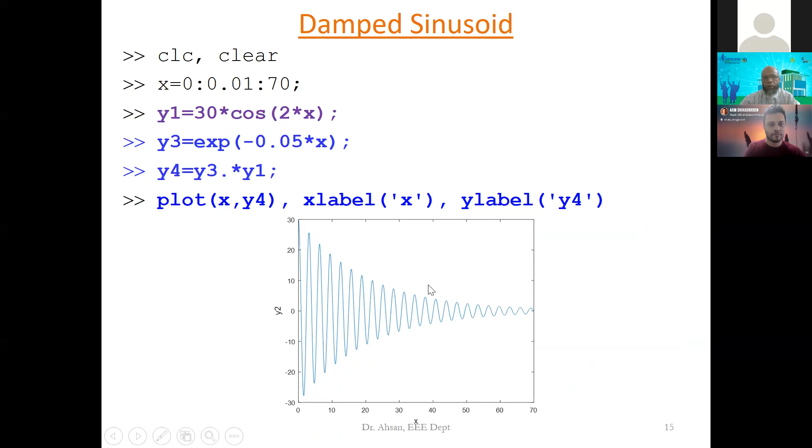So in fact, this is damping the amplitude of this cosine wave. So the ultimate waveform will look like this. Now let us go for our courses.

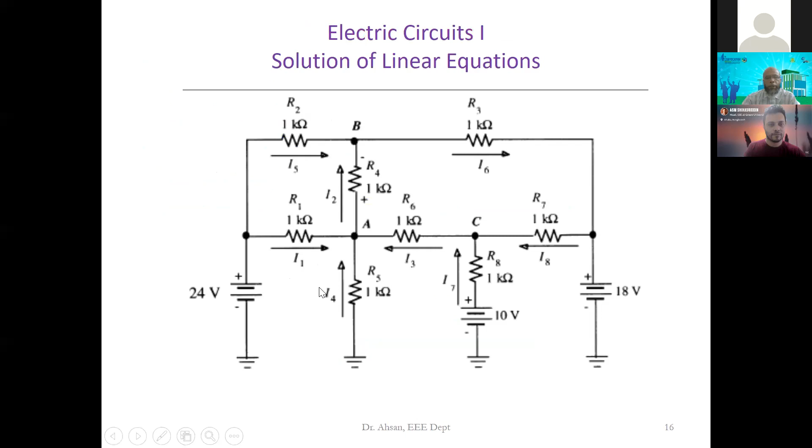In our electrical circuit course, we use nodal equations or loop equations to find the node voltage or loop current or other unknowns. So it will be very handy and very simple to solve a large circuit with a large number of nodes, just by writing these node equations and then rearranging them in a matrix form.

Let's say we have 3 nodes, VA, VB, and VC. So with a single command, you can get the node voltages. So this is my A matrix, which is this one, and this is the B matrix, which is on the right side, and with the single command, either A inverse B, or this A \ B, that will give you this operation and give you this result.

So this is a one step solution. So I will not go for this one in the Matlab running program. I will go for a little bit more complex programs. So for large or complex programs, we'll go for the script file, or we frequently call it the M file. So this M file is a collection of executable commands.

So just now I showed you some commands in this command window. We can put all the commands or all the plot commands in an editor window, and then we can run them together. So that file is called the script file, and it is very useful for executing a lot of Matlab commands.

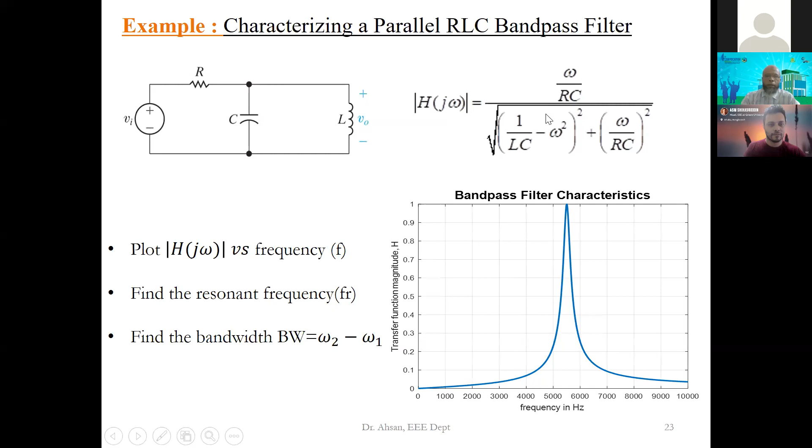So for this, what will we do? We have this, and this is called your transfer function. So we will just solve this equation for different frequencies, and after that we plot it. Only 3 steps. So that is what I am doing here. I am creating an array for different frequencies, solving that equation for different frequencies, and after that I am plotting it. It is as simple as this.

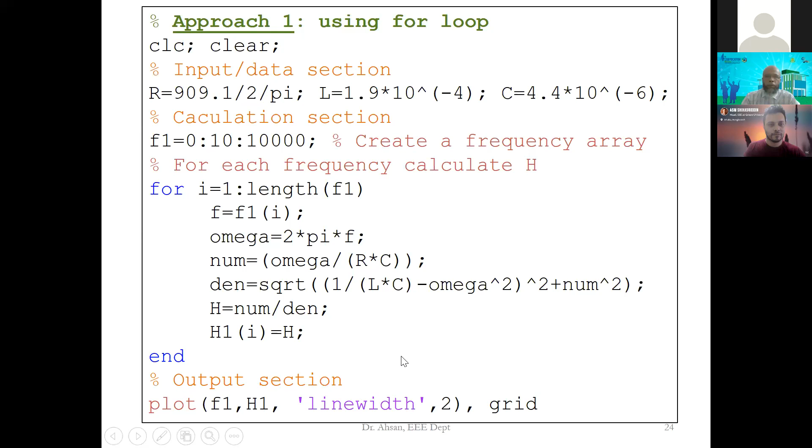And now we can solve this even without a for loop. And how can we do it? We will just create an array for the numerator and another one for the denominator, and then do element by element division. That will give you the same value as with the for loop. So sometimes this element by element or dot operation will make our programming very simple, very easy to understand.

And that will give you the same kind of plot. Now, what is after this plotting? We want to find the bandwidth and the resonance frequency. So the resonance frequency is the value where the peak is, or we call it the center frequency. So from the graph, we can find it easily. And also for the bandwidth.

So for the bandwidth, we find two cutoff frequencies. One is called F1, another is called F2. So how will we decide this cutoff frequency? This is called the half power point or level, where the power will be half of that at the resonance frequency. So we can draw a line, this one, using this simple command.

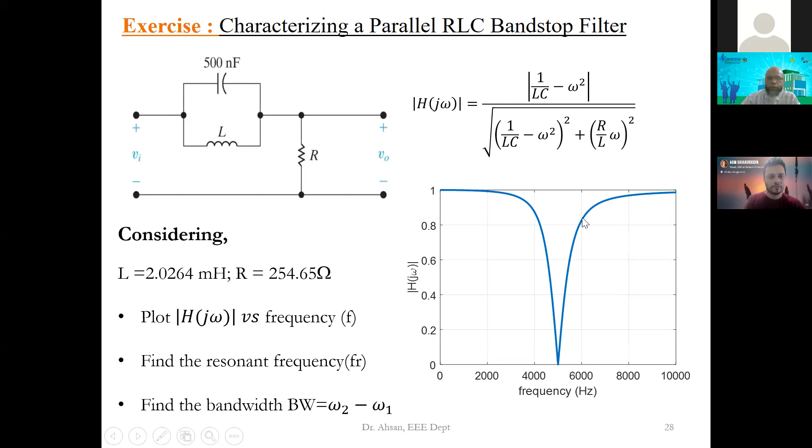So this is my center frequency, where the value will be the minimum. For the band stop, it will be minimum. For the band pass, it will be the maximum. And we can also find its cutoff frequencies by drawing this half power line.

Now let us go for the signals and systems course. For signals and systems, we frequently use the Fourier series. Let's say for a square wave, this is the Fourier series. Now, let's say we want to see reconstruction of the signal back to our square wave. This series is basically nothing but the summation of sinusoidal waves of various frequencies. The first one we call the fundamental frequency signal, and the others we call the harmonics.

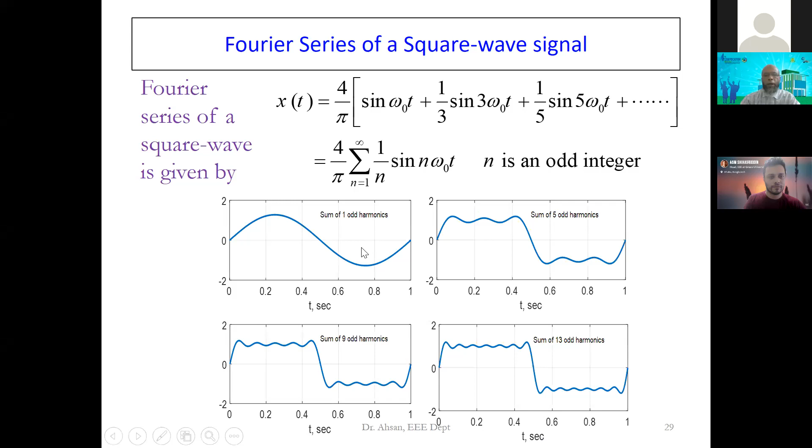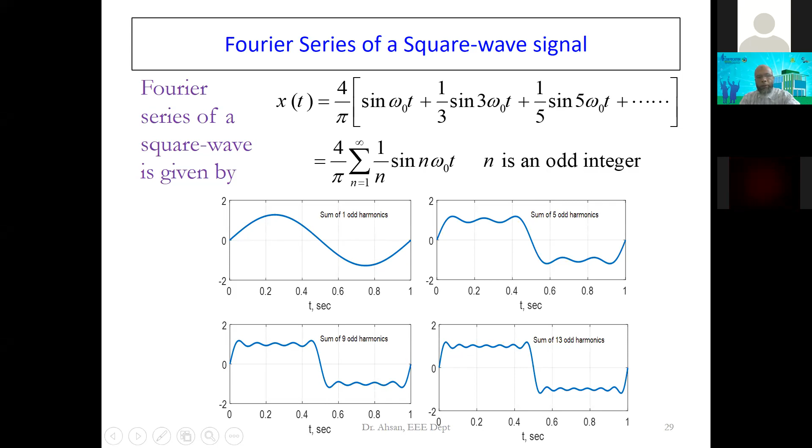So what will we do? If we run this for the fundamental frequency only, then we can see this kind of sinusoidal waveform. But as we keep on increasing the number of harmonics, it will slowly turn into the square wave. I will show you this. Let's say for the square wave, this run button is here. So this is for the fundamental frequency.

So as we keep on adding the harmonics, it is slowly turning to the square wave shape. In fact, it is reconstructing. And here I'm considering only 51 odd harmonics, so that means adding all the harmonics up to the 51st. It is giving us this kind of reconstruction.

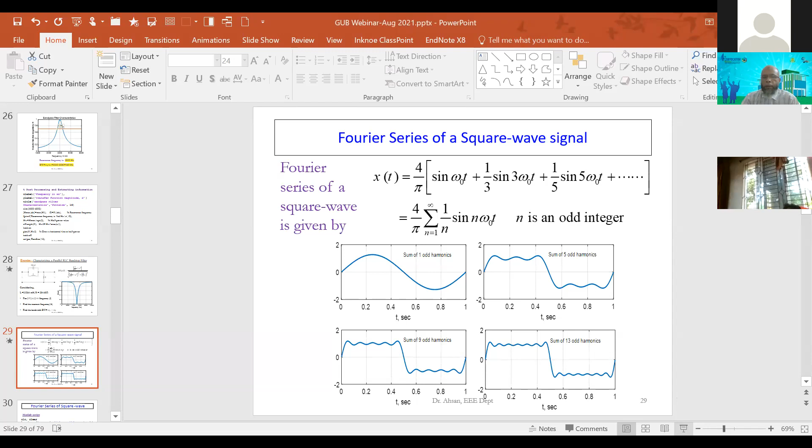And for the other one, let's say... Okay, for this, we are just executing this simple equation with for loops. Very simple. Here is all our data, and here is the plotting. The main calculation here is very simple. It starts with the fundamental frequency signal and then keeps on adding the other harmonics.

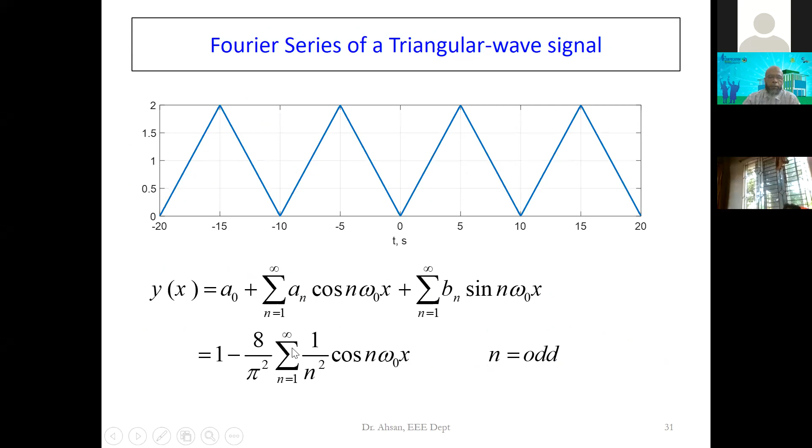And let's say another one. This is called the triangular signal, and for this, the Fourier series is this. So now we can do the same operation we did for our square wave. We need to solve this in a for loop and then plot it. So for a triangular wave, if we run it, this is for the fundamental wave.

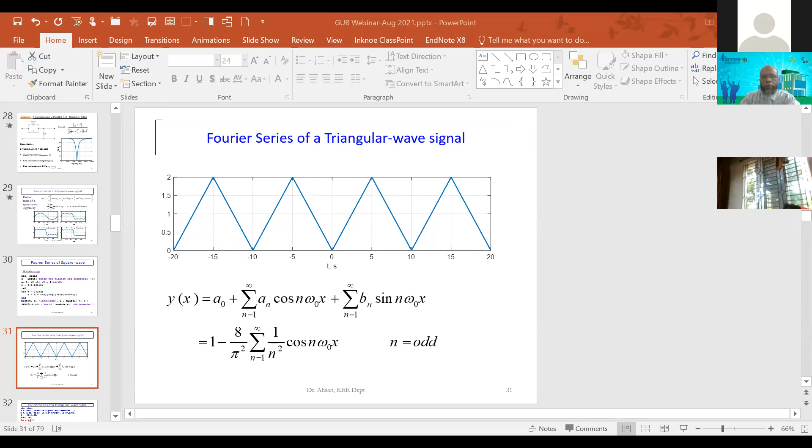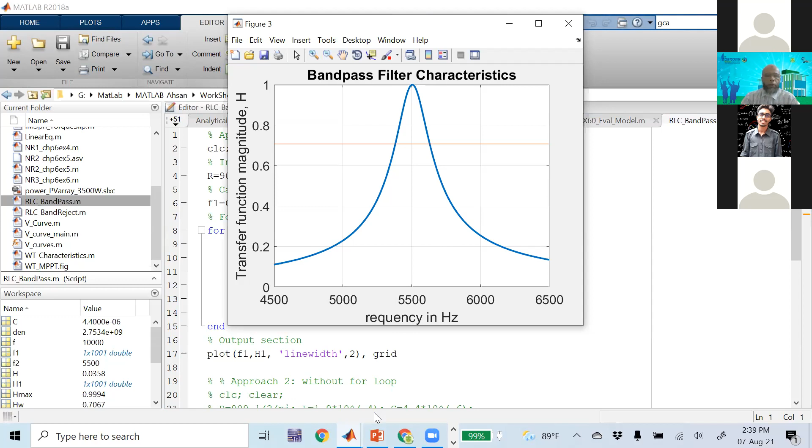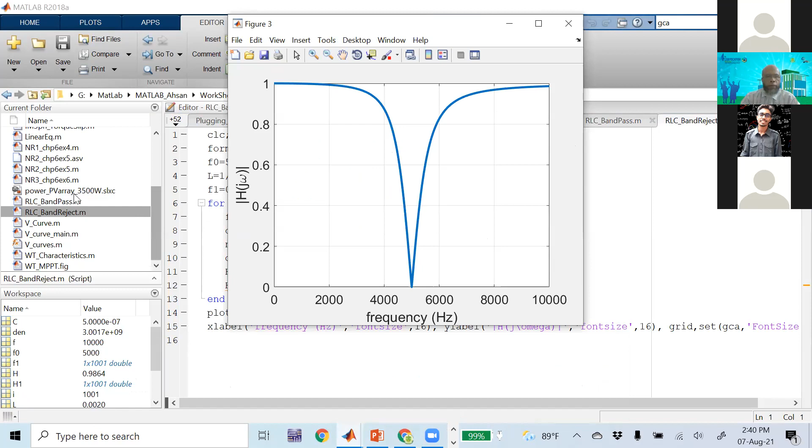Okay, good. And for the band reject, so this is the output for the band reject filter. And the programs, as I showed you, the same coding or the similar coding we are using inside the Matlab also. So I will not spend time for that.

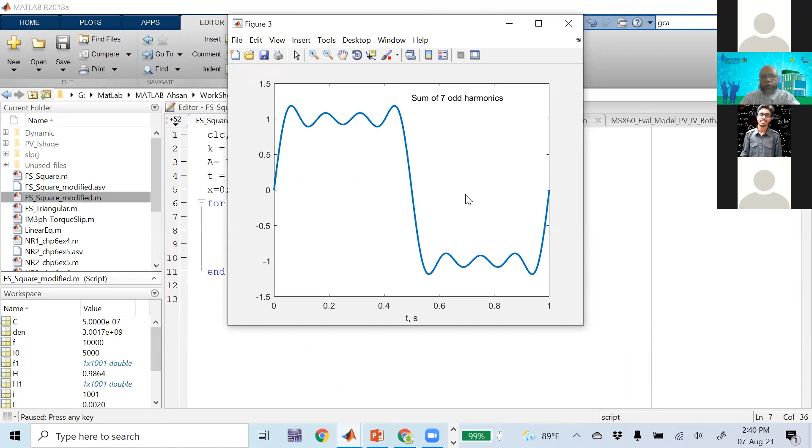Now I will go for this square wave Fourier series. So if we run this part, let me close this one. So for the fundamental frequency signal, we can see this is a nice sinusoidal waveform. As we keep on adding the harmonics, it will slowly turn to this square wave, or it is basically reconstructing the square wave. So can you see it? Yes, everybody? Okay.

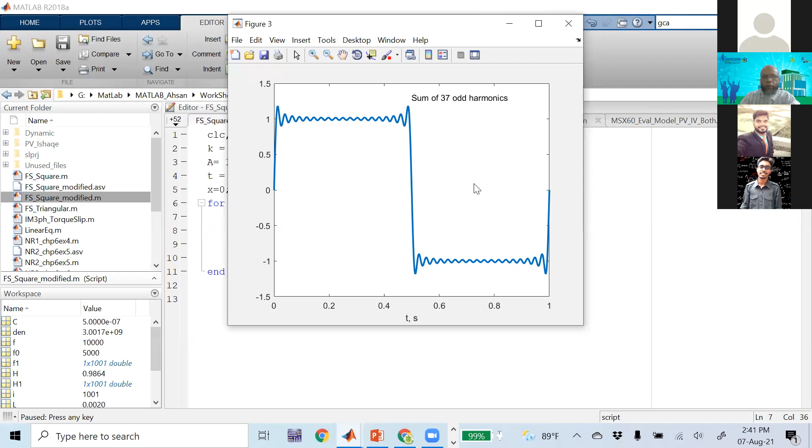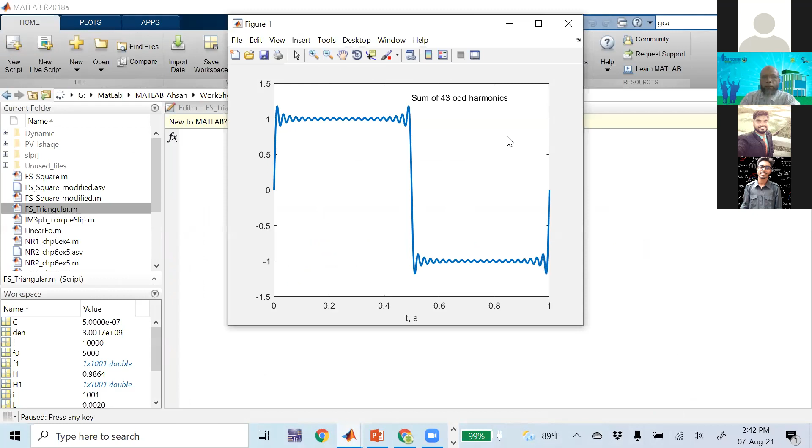Now for the triangular wave, the similar things. What you missed out, just quickly. It's taking time. I don't know why it is taking time. It is running in the background. I did not finish actually that one. That's why it did not finish.

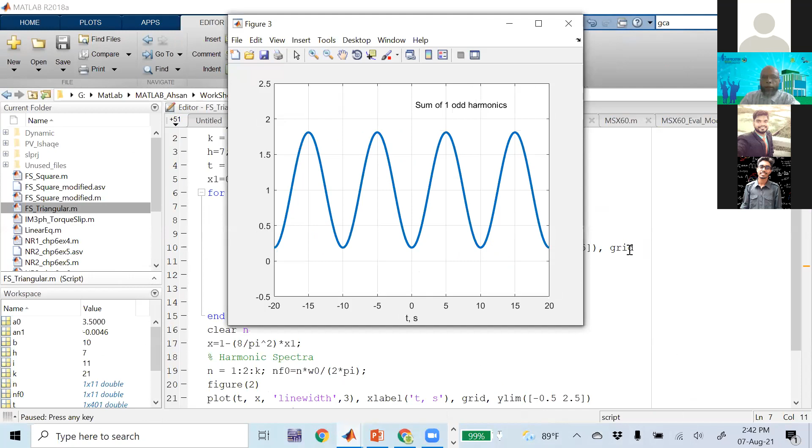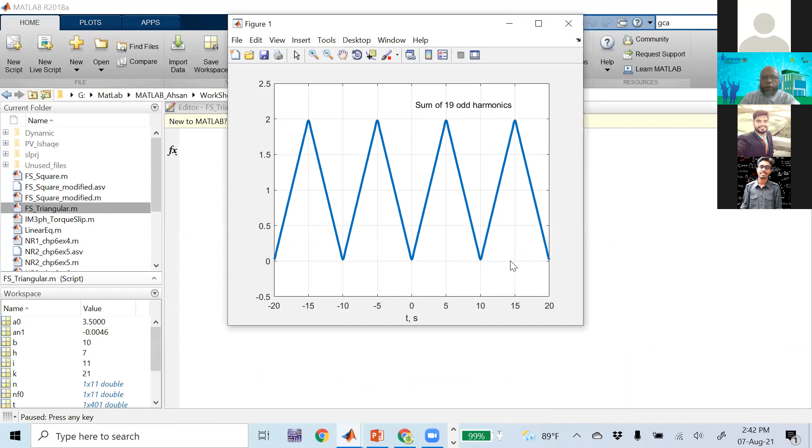Okay, for the triangular, we are doing the similar thing. So this is for the fundamental wave. If we keep on adding the harmonics, then it will slowly turn to the original triangular wave. And as I said, we want to see its spectrum plot also. Actually, it ran. So this is the spectrum plot.

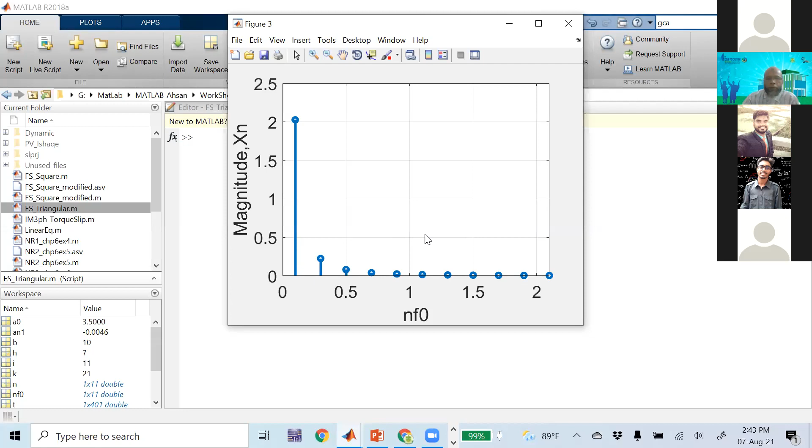From this, we can see the fundamental waveform has the highest influence. The second harmonic is a little bit, and the third one; after that, these harmonics are insignificant. Their contribution to the reconstruction of the original signal is insignificant. So basically here we need these three components to reconstruct the signal. Okay, now I will go further.

Can you see the screen now? Yes, sir. PowerPoint. Okay.

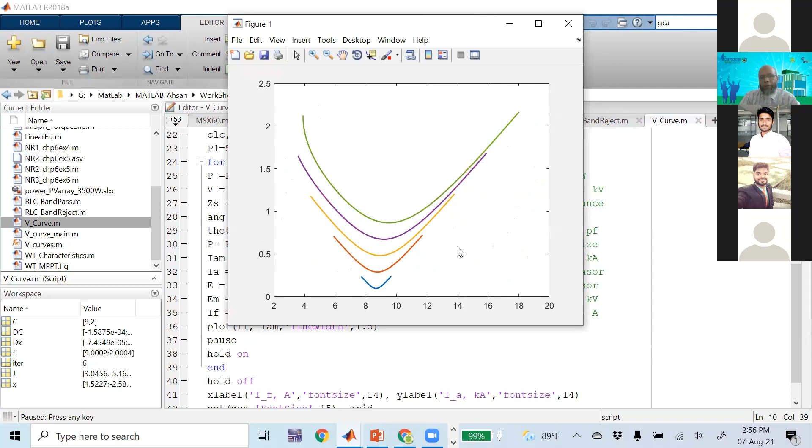So here it is giving some information related to the power factor. This lowest point is called the unity power factor point. If we join all these lowest points, we get a locus for unity power factor. The right side of this is called the leading power factor region, and the left side is called lagging power factor. So now the conclusion is by varying IF. On this axis we have IF.

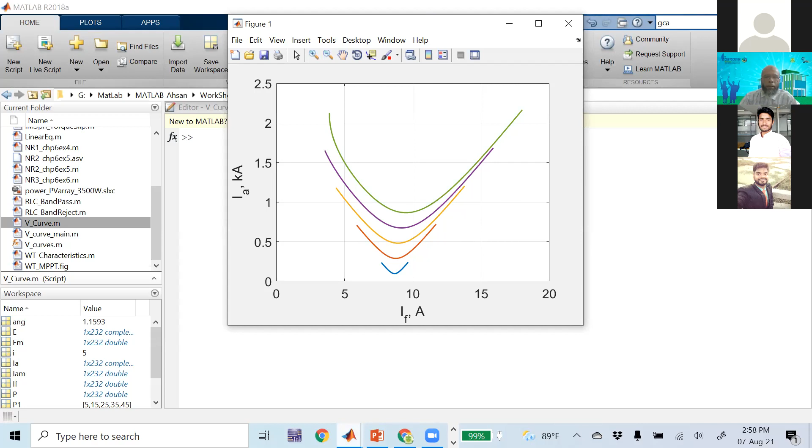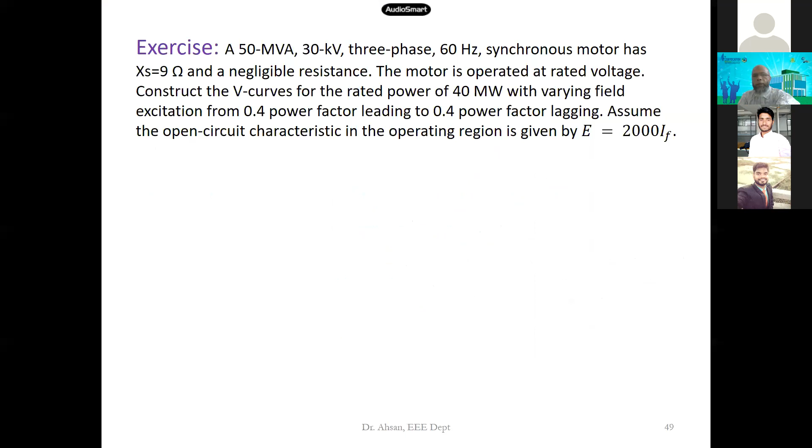So this machine is very useful; we frequently use it for power factor correction of our power system. This is a very popular use in power systems, since we can make a smooth variation of the power factor in the system. So these are the V curves, and this is the problem, or the data I took it from.

For calculation, I did only these 3 operations. From the power, I calculated the armature current, then EA and IF. Only by these 3 calculations can I produce the graph. And that program was for a single power.

So now if I vary this power, let's say from 5 megawatt to 45 megawatt with an increment of 10, we have to do the same operation in a for loop, or here I am using element by element multiplication, the dot multiplication. So instead of using the for loop, I am avoiding it by using this dot multiplication. And we have already seen the plot of this.

Now, how can we do the same plot using a function subprogram? Here, this part we are calculating again and again and plotting for different power. So if we put it in a function subprogram and call it in a main program, then our main program will look very simple. We are varying power, calling this subprogram, generating a plot, and doing the same thing until the loop completes.

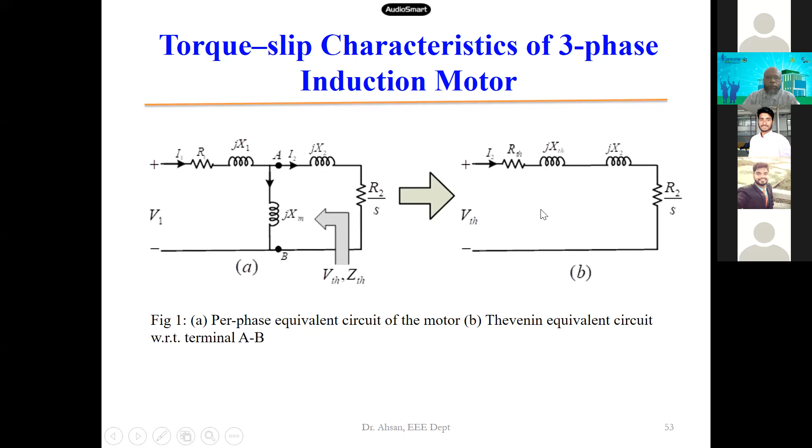Now we will go for another machine. This is called the induction machine. So how can we characterize this induction machine? This is the very simple equivalent circuit of an induction machine, and from there the Thevenin equivalent we can write like this. I will not go for the theory of this.

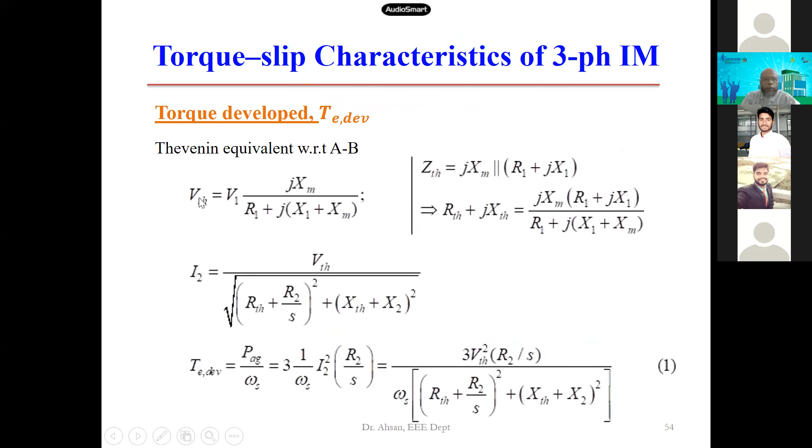And this is the electrical torque developed equation inside the induction machine. For generating this, we call it the torque slip curve of the three-phase induction machine. We will solve this one. For solving it, we need this I2 and V Thevenin also. So basically we will be solving these three equations. So let us solve it.

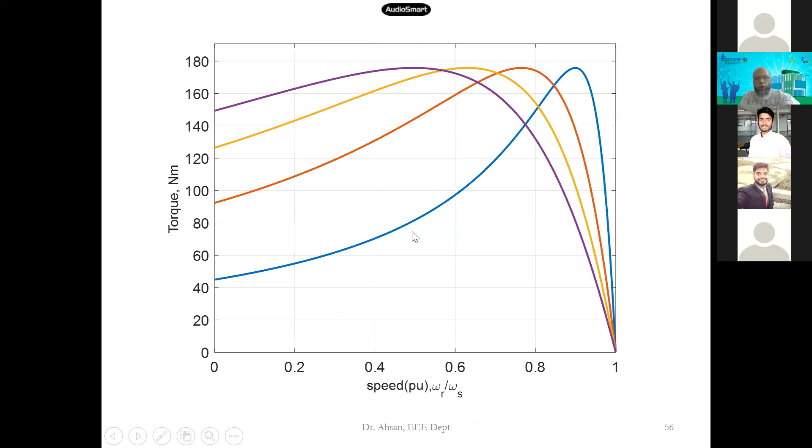okay. This is the characteristics curve for a three-phase induction motor, and this is called the torque slip characteristics. And we produced it for a certain value of R2. But if we keep on changing R2, what will be the effect of R2 on the torque slip characteristics? This is very important information, and a very important observation also.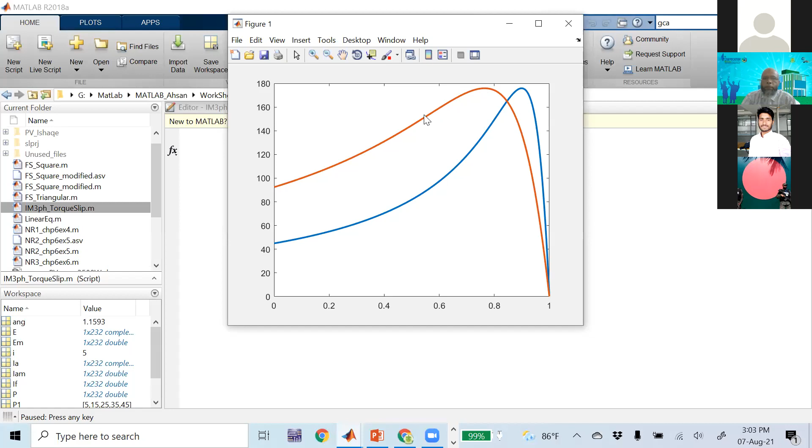If we increase R2, then the curve shape will be similar to the previous one. If we keep on increasing, it will take this kind of shape, and then this shape. So what information are we getting from here? This is the torque, and this is the speed. And we can see this maximum torque is remaining the same. It is not changing with the change of rotor resistance.

But what it is changing is the starting torque, that means torque at zero speed. With the lower value of R2, our starting torque will be small. And if we increase it, then it will be higher and higher. So this tells us that if we need to run a loaded machine, then we need to increase the rotor resistance, so that it will produce a higher starting torque.

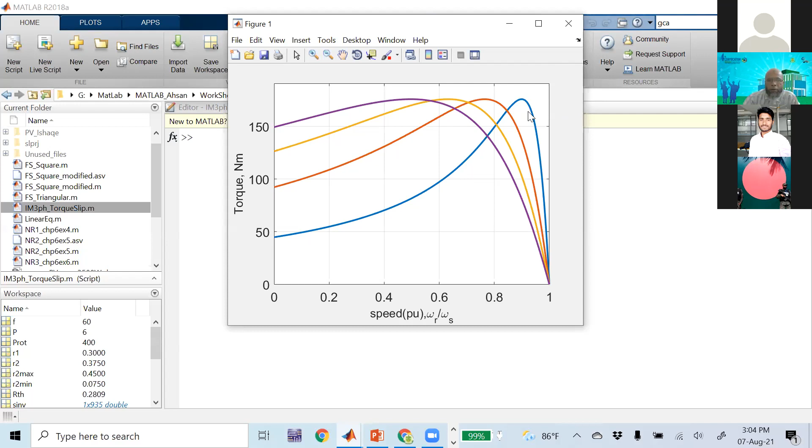But at the end, we have to cut off this rotor resistance, because if we keep this higher rotor resistance a long time, then we will have a higher loss. So at the beginning, for starting purposes, we increase the rotor resistance, then slowly cut it down. So this is the information it is giving us.

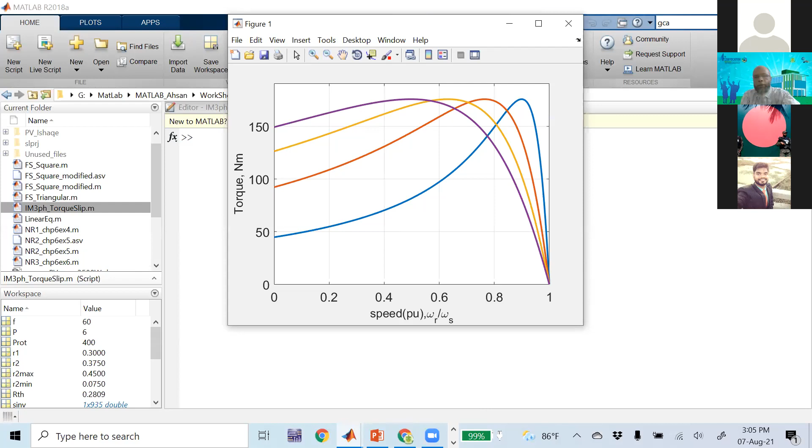Now we will go for dynamic equation solving, or dynamic systems. In fact, more interesting results, or analysis, we will see through the solution of dynamic systems. For solving a dynamic system, we write the dynamic equations or differential equations, and then we use the solver. Depending on the solution type or the equation type, we have different kinds of solvers.

This solver mainly has three parts. One is we have to write a function subprogram containing the differential equation. Then the time span, for how long we want to see this analysis, and the initial value. For solving any differential equation, we need the initial value. If the differential equation is third order, we have to put three different initial values. And we can have some other options also. Here is the description of all this.

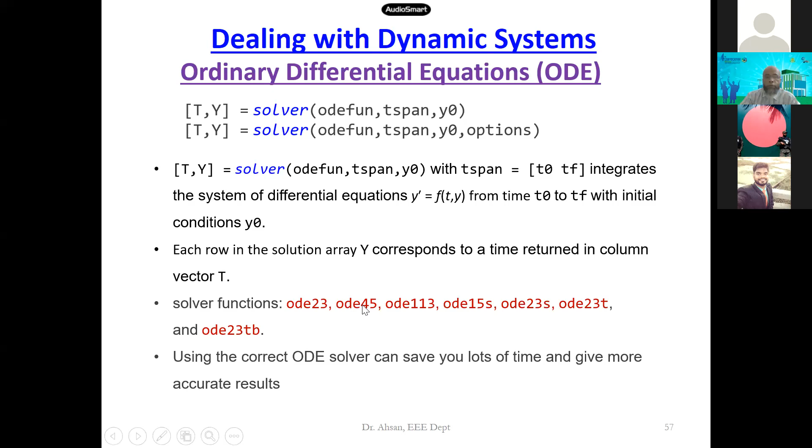So now let us look at the dynamic characteristics of our separately excited DC motor. Here you can see some interesting things. Let's say we have a DC motor, separately excited. That means the field circuit is separate from the armature circuit.

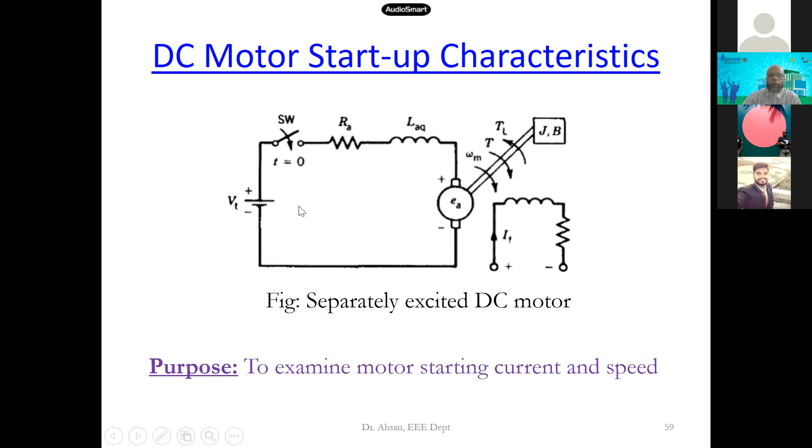And if we suddenly turn on the machine by connecting, that is switching on with the full voltage, then what will happen? So that is the thing we want to see. So for this, we need to write the dynamic equation. So the dynamic equation is given by this. One is for the armature current and another for the speed.

So this Vt is constant, Km constant. Here the only variables are Ia and omega m. The other things are constant. This is the inertia, this is the inductance, this is the load torque. So now we need to solve this thing using this ODE.

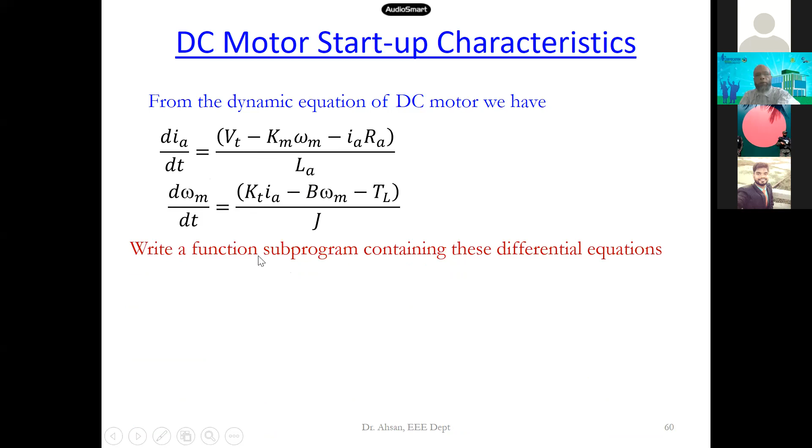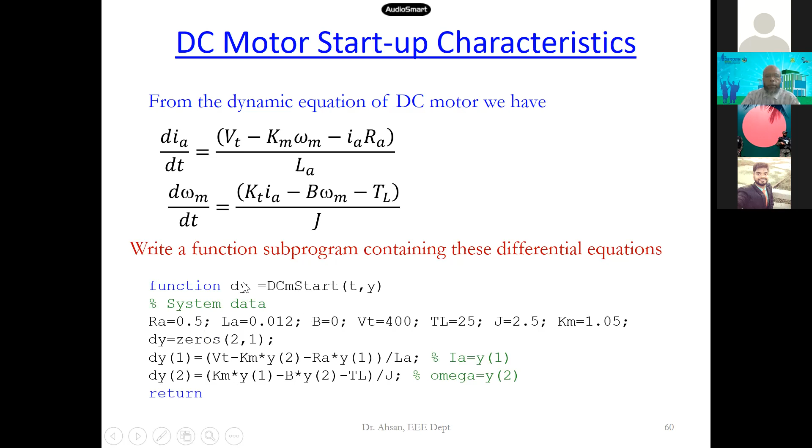And for this, we have to write a function subprogram. And this function subprogram will be this one. One is for the first equation, another is for the second one. Very simple. This is the second order. So here we are giving the name for the function subprogram. Here, this is the output it will return, and this is the input.

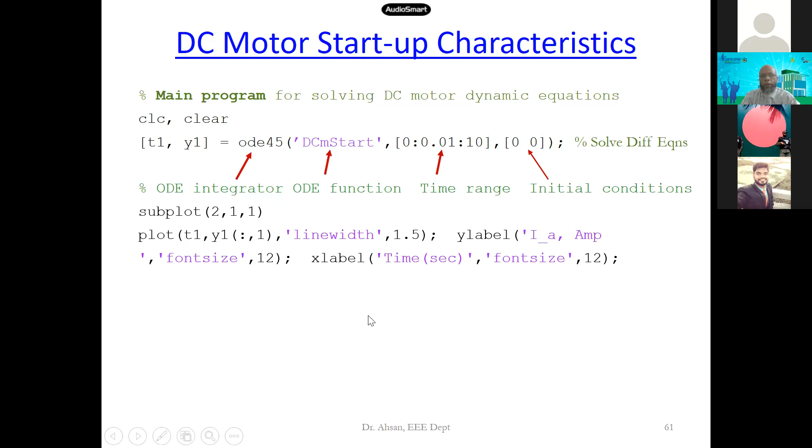So let's say we are calling this in a main program. So in the main program, we are just calling this function subprogram, and we are using this ODE45, and this is the time span, and this is the initial condition. So now, after running this, if we plot it, and remember here we are using another plot command. This is the subplot. That means we want to see two plots in one page, and this is the coordinate we are mentioning. So now what will we see?

If we run it, then we will see the variation of Ia with time, and variation of omega, speed. So what we are observing here, we can see when the speed is 0, that time this current is very high. That's why in our DC machine study, we always say we need a starter, or the starting arrangement. Otherwise, the machine will damage. So this is the visualization.

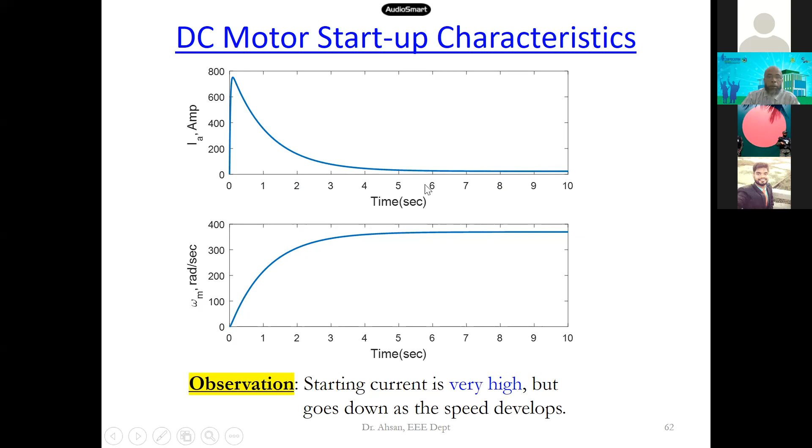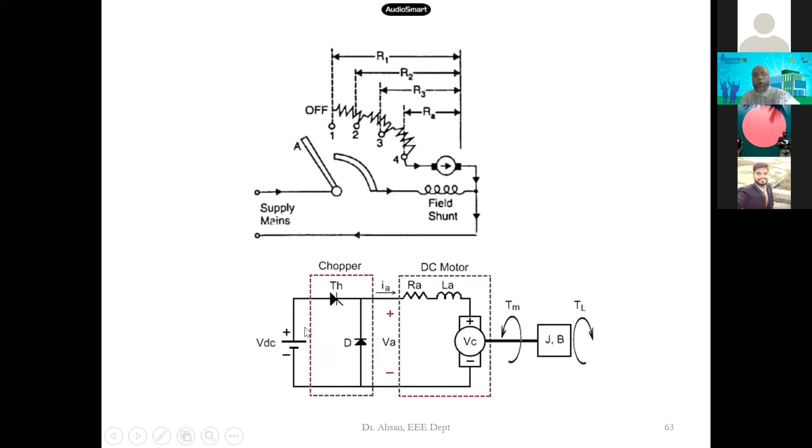We can see that the starting current is very high, and as the speed builds up, this current will be very low. So for this, we have several arrangements. For the starter, we are actually adding some resistance with the armature circuit so that the starting current will be smaller, or we can use reduced voltage starting by some controller.

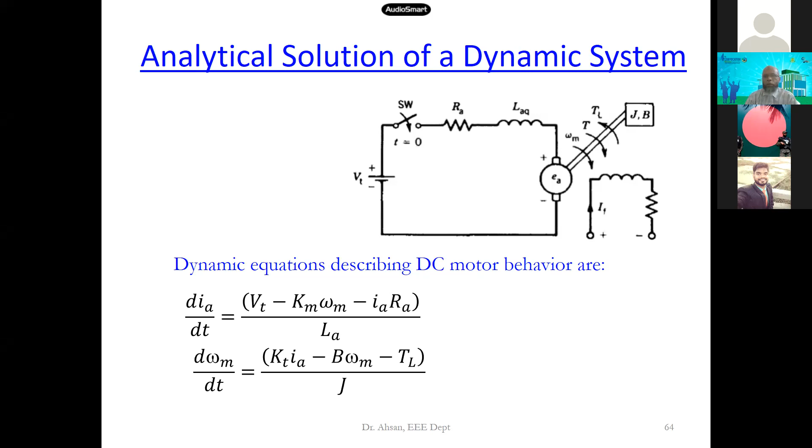Now, let's say we are going for another situation. In fact, we can create a lot of scenarios. Now, let's say the machine was running fine. The same machine, it was running. Before, it was in a stop condition, and we just started. Now we are going for another scenario. This scenario is the machine was running at certain speed. Now we want to stop it, or we want to brake it.

So this scenario is, let's say this is the machine parameter. It was running at 220 volt, and suddenly we change the input voltage to minus 220. This operation is called the plugging operation. That means especially for the electric vehicle, if we want to stop it, then we need to reverse the voltage so that it will create the reverse torque and the speed will go down. So if you reverse it directly, then what will happen?

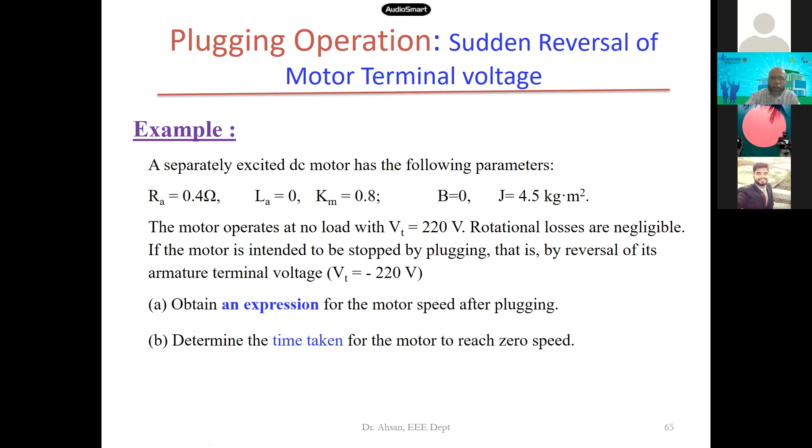So for that, we need to have an expression for the motor speed and also the time taken for the motor to reach zero speed. So what will we do? We will do the same operation. Since here the requirement is we have to find the expression of omega t, that means the mathematical equation. And that thing also we can solve using MATLAB. Instead of the numerical solution, we will go for another kind of solution. This is called the symbolic MATLAB solution.

So what will we do? First of all, we'll find the initial values when we are changing the switch. So before changing the switch, whatever the state was, that is my initial value. And then we'll solve this differential equation by taking the Laplace, then doing the partial fraction and the inverse Laplace. In fact, we teach this in our signals and systems course. And for part B, we will solve it numerically. So let us look.

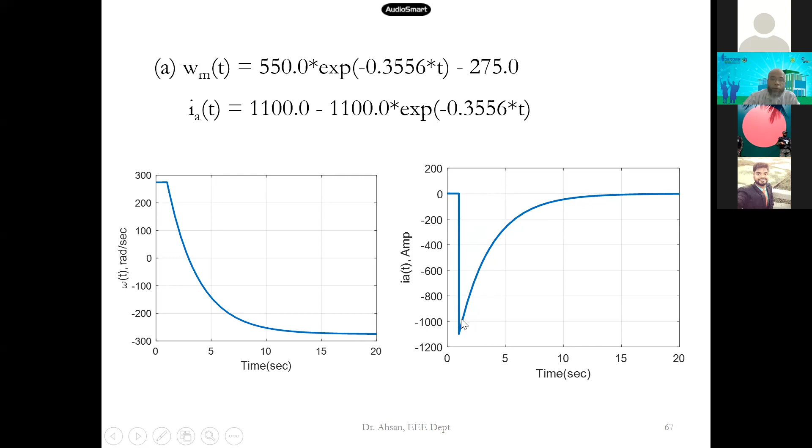So you can see if we reverse it directly, then the current will reach very high, over 1000 ampere. So that will definitely damage the machine. So for that, what arrangement do we have to do? We cannot reverse the voltage polarity directly. Rather, we have to change it gradually so that the difference between the internal voltage and the terminal voltage remains the same, so that the current will remain in a certain limit.

So that thing, let us see in our Matlab. For this, 1 minute. Where is this? Okay.

So the first part, I'm solving it using symbolic Matlab. And for symbolic Matlab, we have to use this syms and declare what are the variables we want to consider as a symbol. Even the numbers also you can consider as a symbol. So whatever variable you are mentioning in this syms statement will be considered as a symbol.

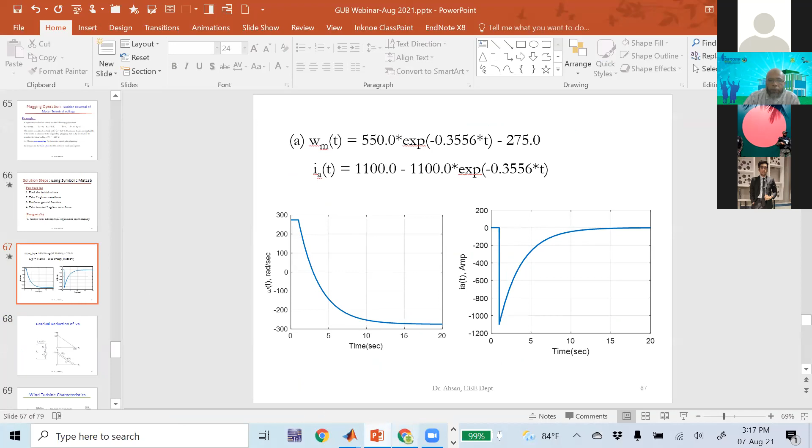Now, we can create many other scenarios. So let's say instead of reversing to full voltage, we reduce it to half of the rated voltage. Then how will the current vary and the speed change? So this is the plugging operation. Here I am solving basically these two differential equations to see the variation of omega. Initially it was with the positive speed. Now it is the negative speed.

And if we do not take care of the input voltage variation, then the reverse current may rise to a very high value. So this is the message it is giving you.

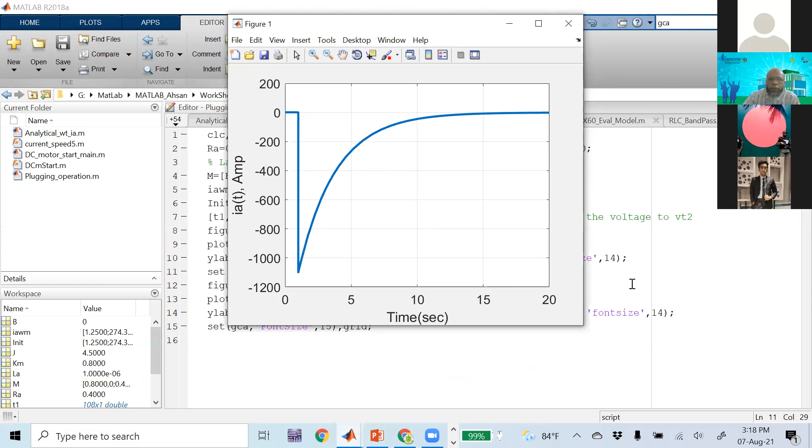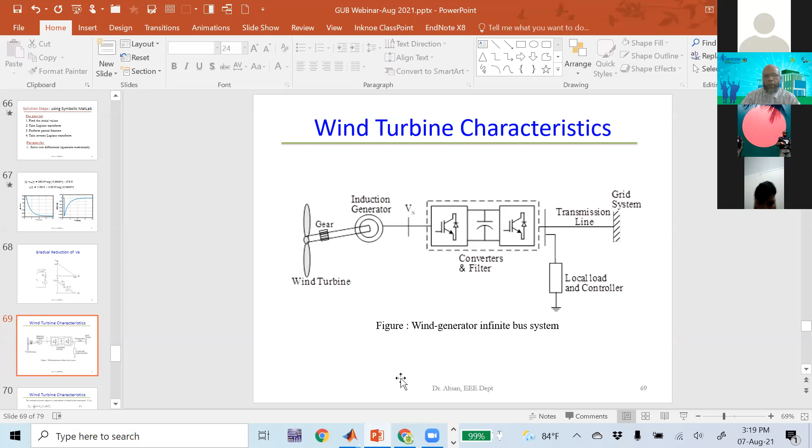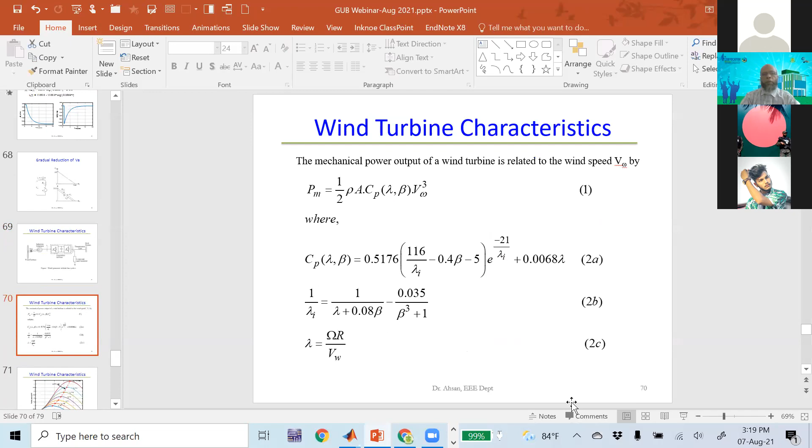Now the characteristics of this wind turbine follow a complex equation. This is not a simple equation. The mechanical power it is generating follows this equation: half rho, this is the air density, A, this is the area of the blade or the swept area, and Cp, this is called the power coefficient. This is not a fixed value, but it has a complex expression itself.

And this, lambda, is called the tip speed ratio. This tip speed ratio is this, and beta is the pitch angle, and VW is the wind speed. So here the wind speed is the only variable. The other things, we can say for a wind turbine, are fixed.

Now, the blade pitch angle is also variable. So this is not constant. So we can control this for controlling the output power. So the thing is, Cp has complex equations, where this lambda i is related to the pitch angle with this equation. So all this gives us a complex expression.

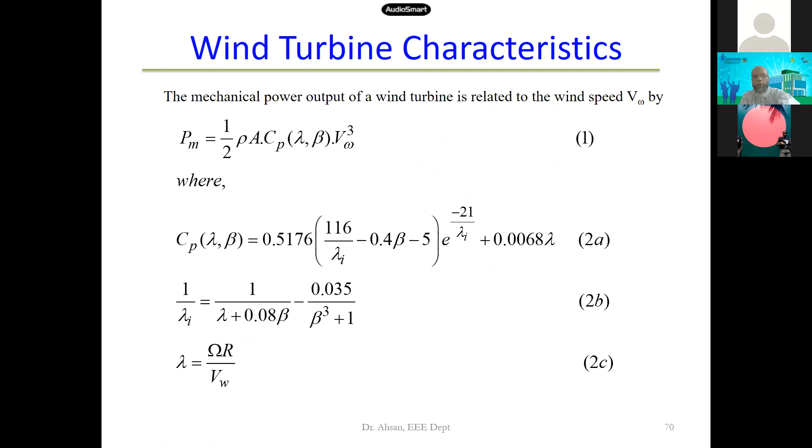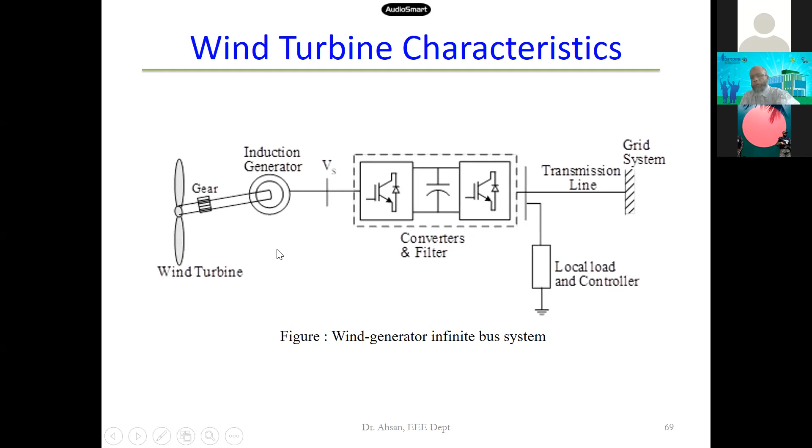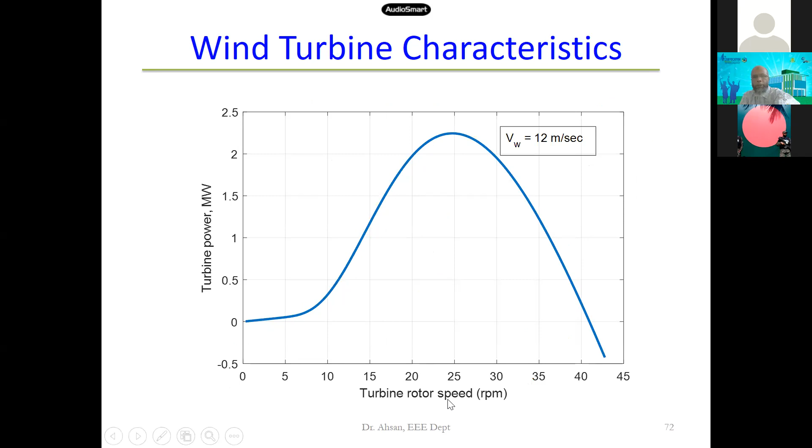So this is the variation of the wind power with only one wind speed, and this is the turbine rotor speed. There are basically two speeds here: one is the turbine speed and another is the generator rotor speed. Here is the gearbox, and with the gearbox we are changing this speed. So this one represents our generator rotor speed after multiplying it with the gearbox factor, and this is the rotor speed before we multiply it. And this is the variation of Cp with the tip speed ratio.

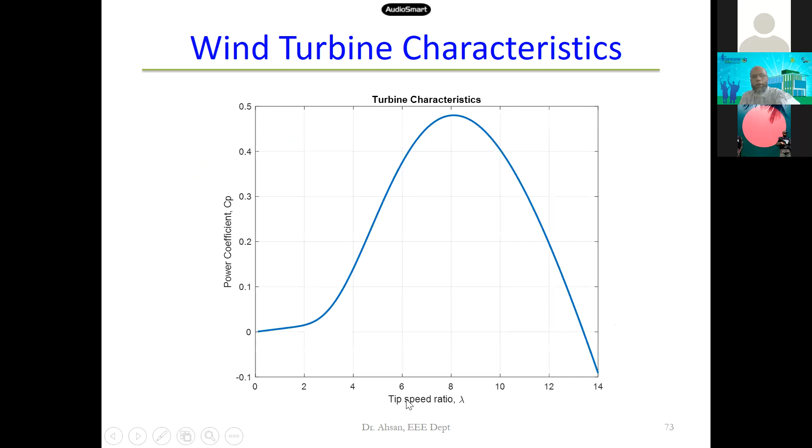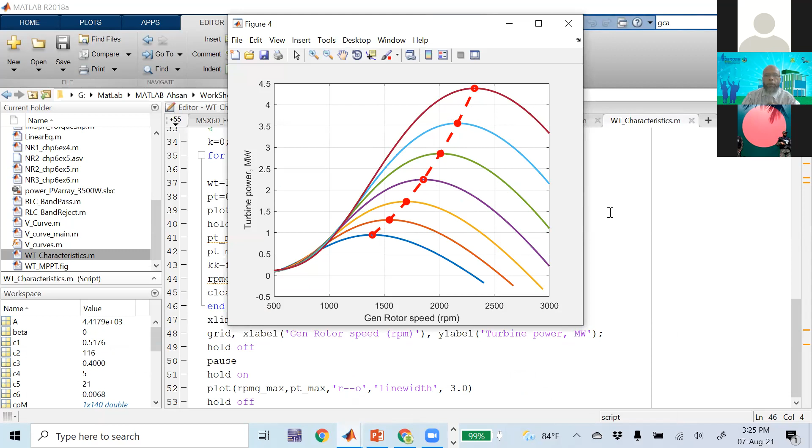So now we can write a function subprogram which will have two input variables: one is the wind speed and another is beta. So if we need to control beta for controlling the wind power, we can. Because we cannot change the wind speed, but by changing the blade pitch angle, we can vary the wind power. So if we want to run at constant power, then we have to use blade pitch angle control. So in this way, we can do some work on a wind turbine.

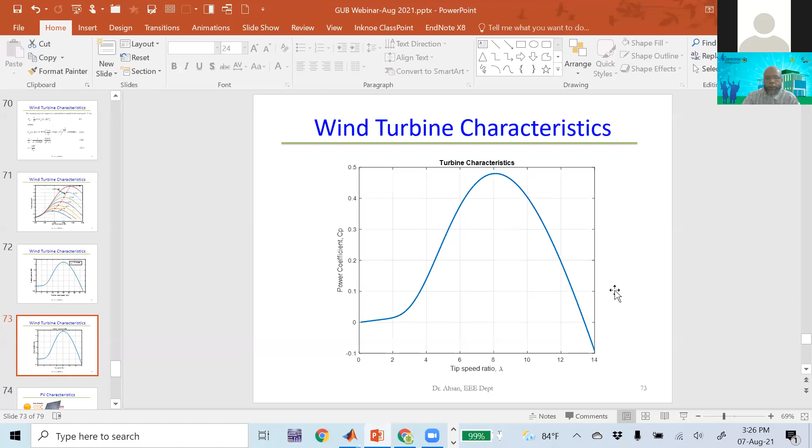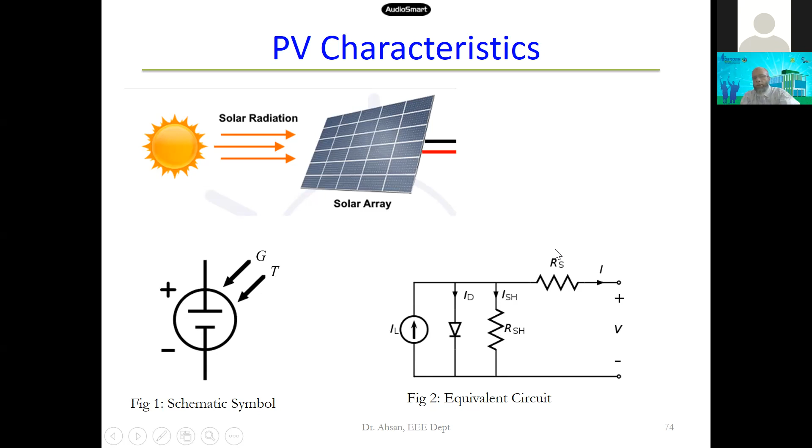Because there are many things we cannot measure, like the shunt resistance, the series resistance; we cannot measure the ideality factor N, this VT, N, RS, the shunt resistor. So we have to estimate these from the manufacturer's data. After this, we have a model of the solar cell, and from there, by varying the temperature and the irradiation, we can get the set of curves for different temperatures.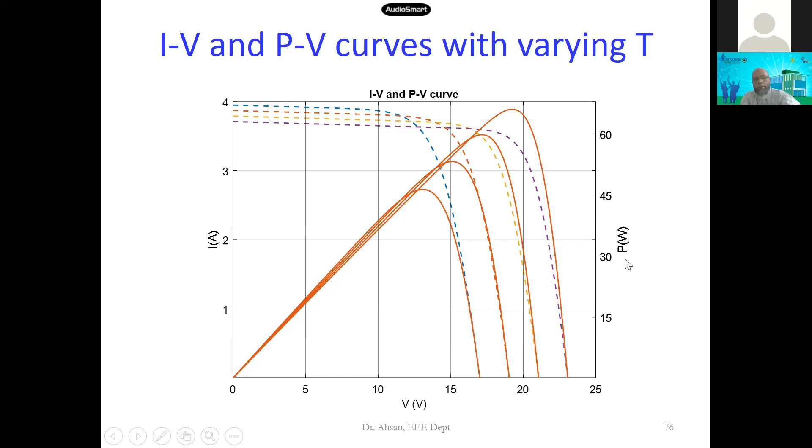So again, as for the wind turbine, we can also operate our solar cell for certain temperature and irradiation for the maximum power. So this is also called MPPT tracking. And so using this set of equations, we can solve this. 1 minute. These equations, and let's say both, and we can generate these curves.

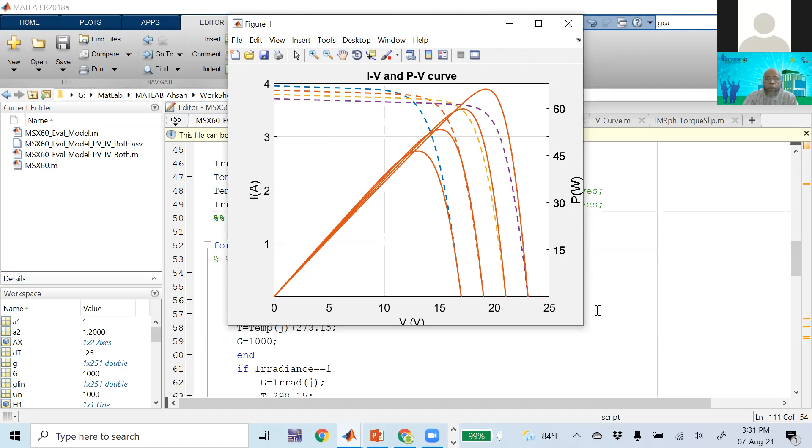Okay, so now only generating this curve is not the main objective. In fact, we need to develop a function subprogram which will have the input of irradiation and the temperature, and the output will be the power and the current. So that we can know that for certain value of temperature and irradiation, this much power we will get from the solar cell. Like this, we can use the other sources of energy like fuel cell.

So I will not go for this today. I did not prepare that one today. So that is the end of today's presentation. So if you have any question, you can ask, or if you need any help regarding this Matlab, you can contact me anytime.